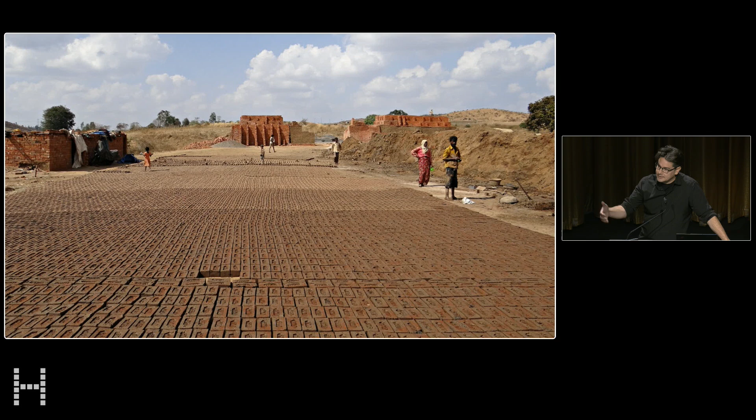It can also be transformed into something more permanent, the raw material for buildings, brick, ubiquitous. It's been described as synonymous with civilization. When we could fire bricks, we could assemble buildings, architecture as civilization making. How big is a brick? Hanif asked me that the other day.

It's important to know, how big is a brick? I put the dimensions here just in case. But the most important thing is it's about the size of a hand, right? There's a relationship between the hand and the brick. On the one hand, you hold the brick with your left hand, you hold the trowel with your other hand, and that was what allows that act to unfold. You could say that the body of the mason is inscribed in the dimensions of the brick.

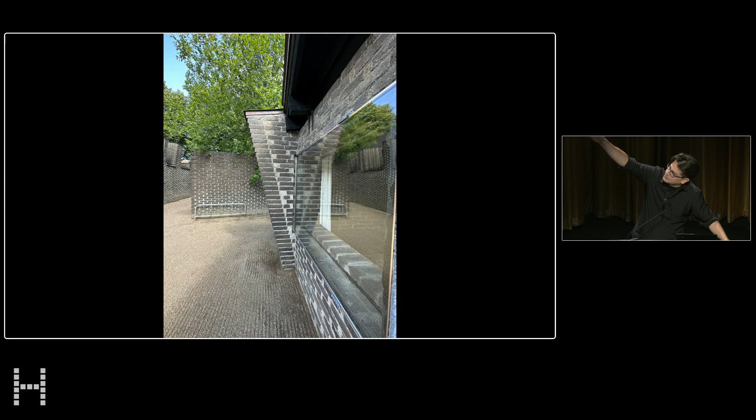You could also say that bricks have their own ethics. They bring a form of making, a kind of rigor that comes from the modularity. So Sigurd Lewerentz said that no brick could be cut on this church in Klippan, Sweden. And that simple rule of no cutting bricks produces all kinds of effects, side effects. Think about this sort of staggered or corbelled wall end with the bricks unable to be cut or staggered. The joints become very elastic and the mortar expands to allow this sort of rigor to unfold.

Closer to home, in the Harkness Commons building just up the road, Josef Albers created this mural entitled America. It's in a building designed by Walter Gropius, and he invited Albers to design a mural. And rather than add something to the wall, Albers removes bricks. He removes material, using shadow to sort of create a pattern, evoking a kind of tapestry or a weave.

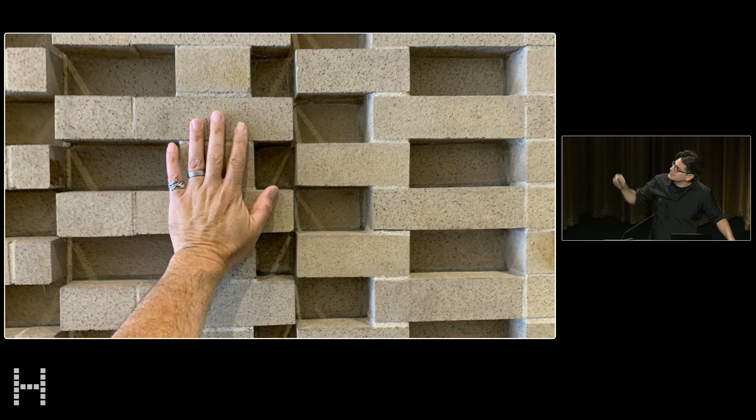You see the kind of precision of the joints, the cut brick, the sort of gap, and if you look carefully, even the gap between the bricks and the lack of mortar in those joints and the light coming through, he's sort of asking us to pay kind of closer attention to these bricks.

So a couple years ago I read this book, Red Brick, Black Mountain, White Clay, and it's been sort of tumbling around in my head. Christopher Benfey weaves a beautiful tale, a search for origins, a kind of narrative of journeys and migration. It's partly autobiographical. Christopher's related to Anni Albers, so he's searching for his origins, but he takes us from Berlin to Asheville, North Carolina, and to Harvard, looking for the sources of bricks, the sources of clay to make porcelain. But really, it's about the creative process. It's about thinking and making.

So I've been thinking about this squishy, slippery substance, clay. How do you become a great potter? You have to make a lot of pots. You need a lot of clay. Clay is an analog for practice, and pottery and its repetition is an analog for pedagogy. Learning by doing it over and over. We have a kind of impatience for solutions. We want our designs quickly, but clay is a slow medium, and I would argue architecture is too. So it's a medium of transformation of the material, but also of ourselves.

How do we train ourselves to become skilled architects? How do we train architects? We need lots of buildings, and we need lots of clay. So with this malleable material in mind, I'd like to share some examples of our work, our pottery, if you will, in the spirit of thinking by doing and continuously reflecting on what we've done and how to do it better. I've organized the lecture into six themes.

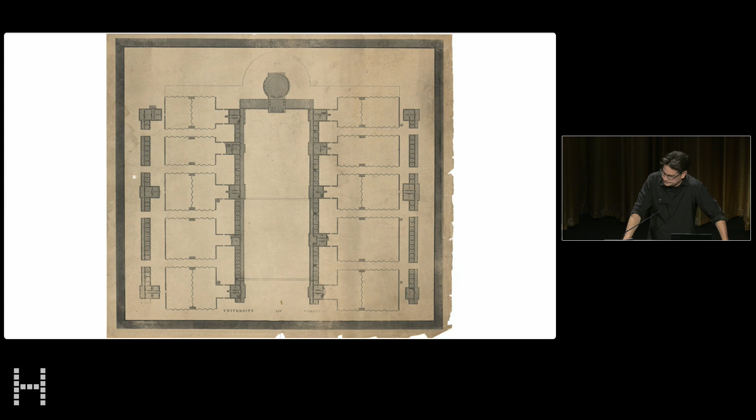Speaking about origins, many narratives of American architecture begin with Thomas Jefferson and this academical village at the University of Virginia. I learned about it as a student in architectural history. The academical village was a utopia. It was a purely conceptualized space of learning, a community of scholars here constructed in Albemarle County, Virginia. The part of Jefferson's plan that most intrigued me was the so-called serpentine wall.

Undulating gently, the curvature allows them to stabilize by effectively spreading their effective base, resisting the tendency to overturn and allowing the bricks to be one wythe thick.

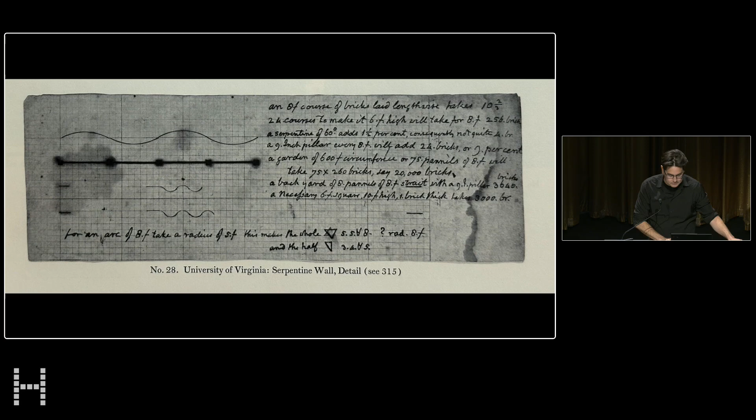This sketch by Thomas Jefferson shows his process of calculating how many bricks it takes to have a straight wall with intermittent structural supports versus how many bricks it takes to use an undulating wall. And his calculus reveals that the undulating wall is cheaper to build, more efficient, and uses fewer bricks. So it wasn't an aesthetic decision, it was an efficiency decision, an optimization, if you will. And that reveals Jefferson to be thinking as kind of a rational designer.

Now, brick makers used to press the bricks to check their hardness before firing them. So this was typical of brick making. But the choice to turn it around, to show us the bricks, I have to imagine that that's an act of resistance, right? If it's typically meant to be hidden, to turn the brick around, to reveal and expose those traces, those human traces, seems to me to be speaking to us. The mason is saying, I was here. We were here. See us.

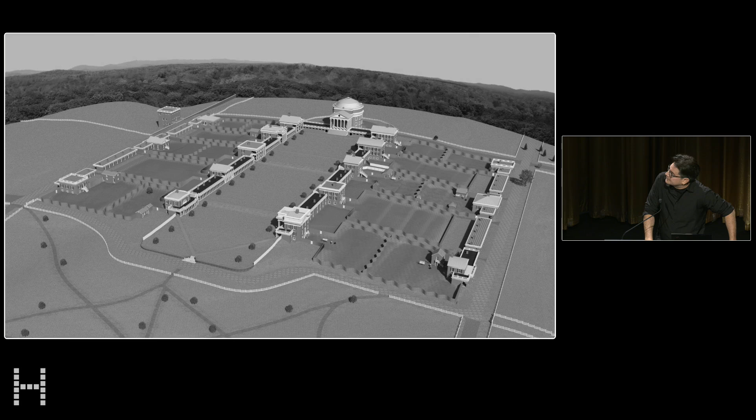The yards behind, enclosed by the serpentine walls, that today are pleasure gardens in a French or English tradition, were actually work yards. This is where the enslaved worked. They chopped wood, they slaughtered animals. They did all the work to make the university function.

And the section through the lawn shows us the rotunda as a terminus. It shows us the pavilions that, from the lawn side, we think are two-story pavilions. Louis Nelson makes a point of saying they're three-story pavilions. Jefferson placed the lawn on a ridge. The land falls away on both sides, allowing a walkout basement condition to occur on both sides. And in that lower level, that's where the enslaved lived and worked.

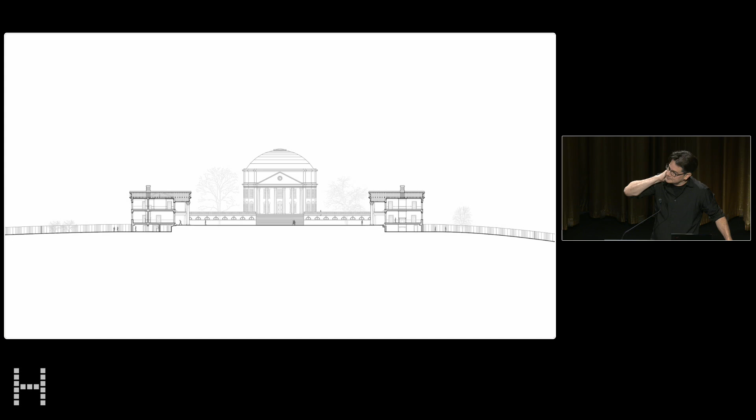Architectural historian Mabel Wilson describes Jefferson's use of the section as an architect. He's using the section to hide the institution of slavery. She interprets his use of section as a recognition that he felt that this institution was abhorrent and needed to be concealed. And the concealing of the section and the labor of the enslaved and the serpentine retaining wall were part of his plan to reconcile a society that he felt couldn't function without it, but was necessarily obscured by the architecture.

So in 2016, it was announced that there was a permanent memorial to be constructed at the University of Virginia. Meejin and I traveled to Charlottesville. We met with faculty who had worked with students on the previous efforts to build a memorial. We assembled a team, including Mabel Wilson, architectural historian, Frank Dukes, a community organizer and UVA faculty member, Gregg Bleam, a landscape architect based in Charlottesville, and Eto Otitigbe, a visual artist based in Brooklyn. And we prepared for the interview.

We engaged the committee in a dialogue, and after that we were awarded a commission to design this permanent memorial. But when we interviewed, we said we don't have a design, we're going to design a process, and that process will unfold over the next 6 months. And over the next 6 months, we'll figure out where the memorial should be, what form it should take, and how it should be defined.

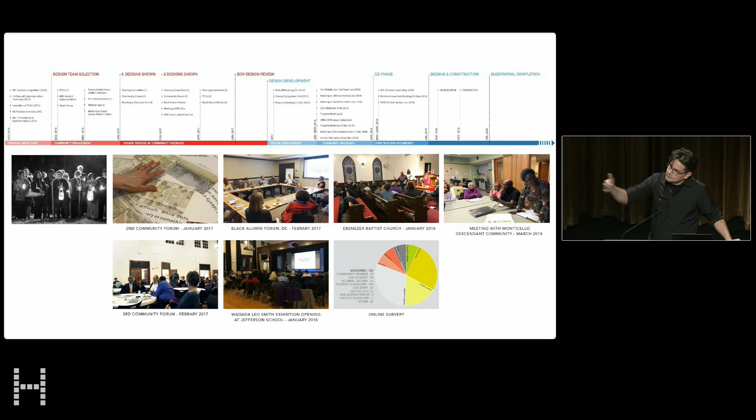And through that process of engagement with the community, with the descendant community, with the faculty and staff, with the students, but also the residents of Charlottesville, we heard what they were aspiring for the memorial, how it should tell truths, how it should begin a process of repair, how it should be situated not on the grounds, which many descendants regarded as intimidating, foreboding, unwelcoming. They referred to the campus as the plantation. The siting of the memorial slightly between the campus and the town.

So here is Mabel and Frank during one of our charrettes studying different locations, some of the engagement processes, meeting with students, meeting with community members, trying to understand what they were hoping for from the memorial. And towards the end of this process, we landed on a site here between the campus and the town. This is a slope site. The rotunda is just above on the top of the hill. And we landed on this form that wasn't an object, but was really a kind of void, a kind of hollow, a kind of opening. And we thought at the most basic level, it's a circle that allows the community to gather, to see themselves as a community.

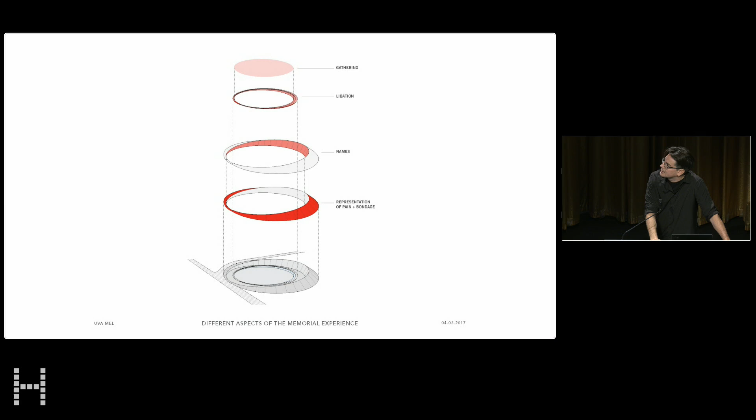The form of the memorial was a kind of a landform. It's sited tangent to the primary path. It forms two rings, one that rises steeply on the inside and more shallow on the outside. And on those surfaces are inscribed the names of the enslaved and a number of historical timeline markers on the inside. But fundamentally, the memorial was meant to be a kind of space of refuge, a kind of clearing in the woods, a place where the community could come, learn about their history, and sort of see themselves as a community.

We did mock things up, and I like to say that if you stand at the base of the memorial with your foot at the slope, you extend your arm, the line between your hand and your foot becomes a plane, and that plane becomes the surface of the cone. So from the inside, you're sort of contained within this horizon line of the memorial. From the outside, you can't see in. And that's important to create a sense of interiority, a sense of privacy and intimacy to sort of allow for a contemplative moment.

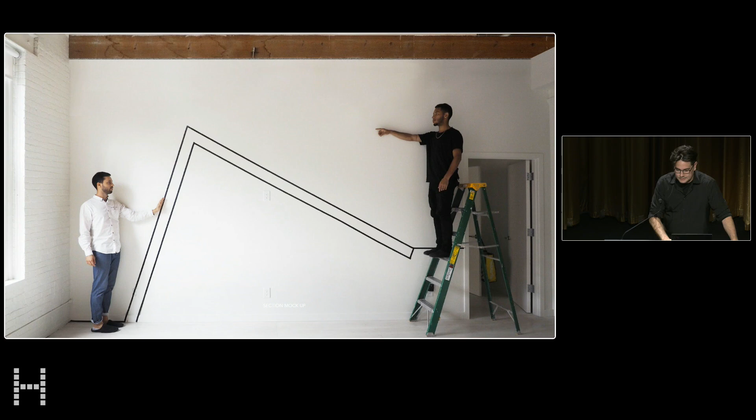And I think as architects, we struggled how to produce and integrate an image. So Eto, who is a visual artist, was visiting one of the cemeteries at UVA, and he took this photograph of this tombstone, and the rough hewn surface of this tombstone he thought was interesting. And he found this photograph of Isabella Gibbons.

Isabella Gibbons was an enslaved woman who lived at UVA. She was owned by a professor at UVA. And she learned how to read and write. After the Civil War, she stayed in Charlottesville, became a teacher, and wrote about her experiences. So she became, in a way, a kind of figure for the project, a figure of resistance, of resiliency. And Eto was taken by her photograph, and he incorporated her photographic image into the memorial.

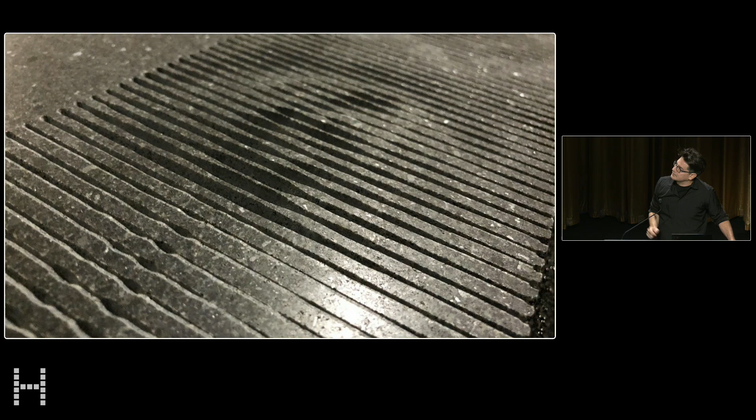And he did this with Isabella Gibbons' eyes, so sort of taking her portrait and inscribing them in the surface of the stone through these parallel grooves. And so as the light changes, you sort of see the image emerge through the variable width of the groove and the variable lighting on the memorial. So the outer face of the memorial has this scallop texture that's related to that rough hewn stone. The parallel grooves are actually evocative of drill marks that we see in quarries. And into those grooves is integrated this image.

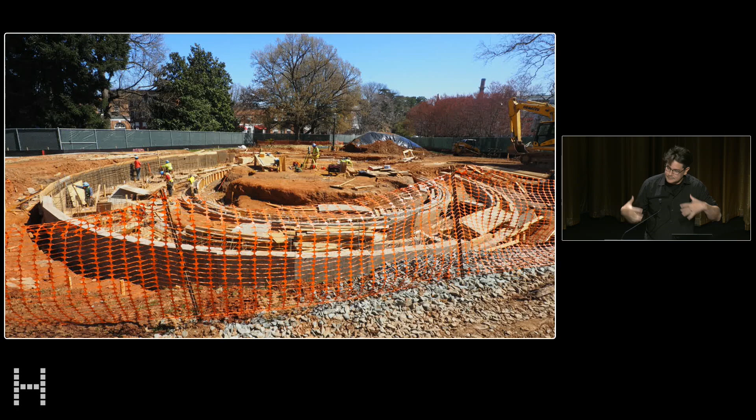And so if you squint at that, you can see the colossal eye of Isabella Gibbons looking out from the memorial. And so if you go to Charlottesville and you look at the memorial, with the right light, you can see her two eyes peering out from the exterior texture of the stone. And some of the descendants describe Isabella Gibbons as a witness and a watcher, that she's watching over them from this memorial. And that's incredibly powerful, that they've interpreted the memorial this way, and they claim it in a way as their own because their ideas went into it, and they see themselves represented in the memorial.

Looking at the construction, I noted the kind of orange color of the soil, which you see in the bricks, but it has a particular richness because of its iron content, transforming an abstract digital model into a physical thing, where one swoop produced by multiple panels of stone perfectly aligned to produce that sense of a monolith is quite remarkable. When you visit the memorial, the path is the path connecting the town to the rotunda, so everybody walks along here. The tangent relationship to the path is an invitation.

It's so easy to just veer off and enter the memorial. And as you go in, the wall on your left rises very slightly. The ground drops ever so slightly, and before you know it, you're inside. And all of a sudden, the university, the town disappears, and you're surrounded by the memorial.

One of the challenges for the memorial was to represent the 4,000 enslaved African Americans that had worked here. And one of the challenges is there were no records. There were no records of their names, and oftentimes they were referred to as extra hands, or they were referred to in property logs or letters describing a carpenter or a butler. They were known for their jobs, their skills, what they were doing. So taking the 577 partial names, the kinship and occupations, we struggled to design something that would acknowledge 4,000 individuals.

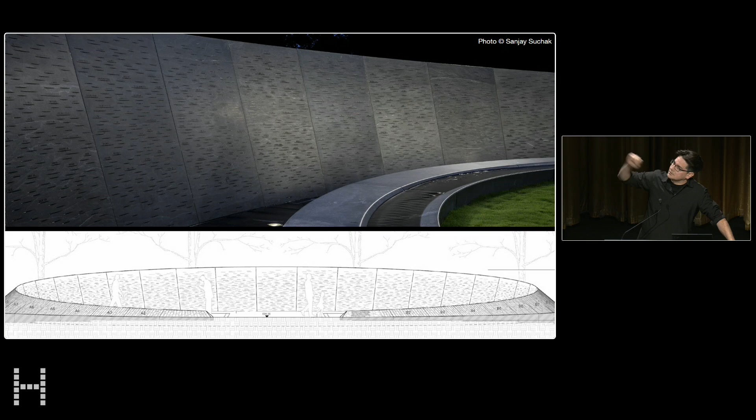And so this was the proposal to etch these memory marks into the stone, these horizontal scores, these grooves. That would be 4,000 placeholders, many of them blank because we don't know what their names were. When we knew the name, we inscribed it. When we didn't know the name, but we knew an occupation, we inscribed farmer, carpenter, bricklayer. And when we knew kinship, we inscribed mother or father, daughter. And so if you visit today, you experience this cloud of grooves, and there's 4,000 of them, and it's in a way staggering just to see 4,000 of anything, 4,000 marks, 4,000 people.

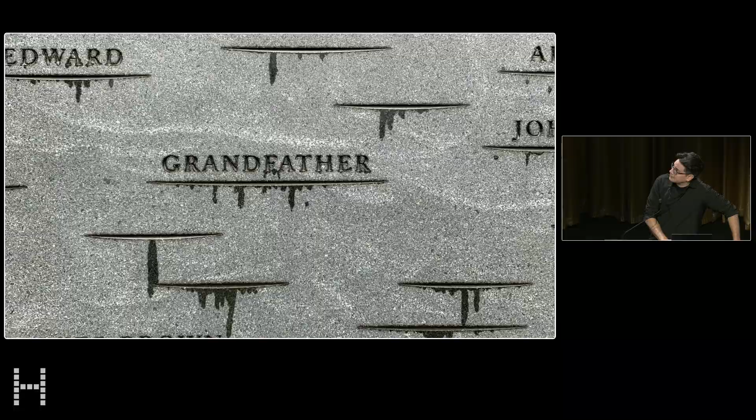But looking at the specifics, because each cut is a person, each cut represents a person whose name we don't know. So it's unknown name, unknown, unknown, grandfather, carpenter, brickmaker. If we sort of pull out and we look at the memorial, it's a kind of a rough exterior with the sort of implicit textures of making, the implicit and integrated imagery of Isabella Gibbons. We see the smooth interior and the contrast between the two.

The memorial was completed just after the murder of George Floyd and just at the beginning of the pandemic. And so in the aftermath of the murder of George Floyd, people were looking for places to grieve, places for people to gather, and the memorial became that place. People came in small groups to take a knee. They came in large groups.

It's across the street from University of Virginia Medical School. So these are the White Coats for Black Lives who took a knee for 9 minutes to remember George Floyd and to be together. And so one of the things that we learned through this was unexpected, this was undesigned. We thought we were looking at injustice in the past, and here it was serving a function of racial justice in the present, but also giving a community a place to be. The idea that architecture and landscape brings people together. It convenes, and that convening power, I think, is its power.

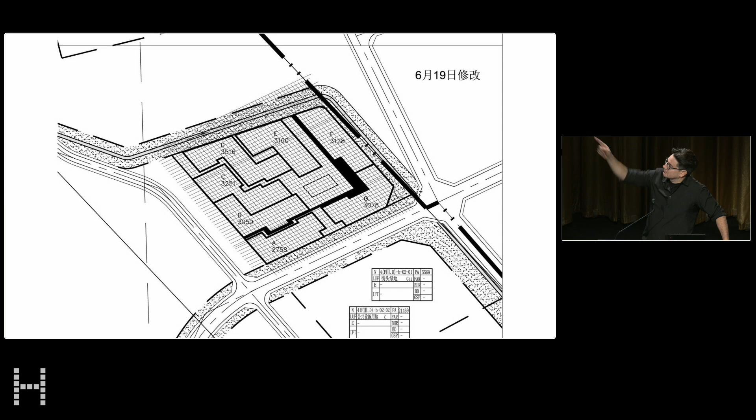Okay, shifting a little bit from memory to material, although certainly there's material in the first chapter. Material inscribes culture, it inscribes place, it comes from the earth that it was made of. In 2009, we got a cryptic email saying, we're working on a group project in Chengdu, would you be interested to join this group project? Maybe you can work on parcel G. There's 2 conditions. We require it to be a courtyard house, and it must have a sloped roof. And we said, sure.

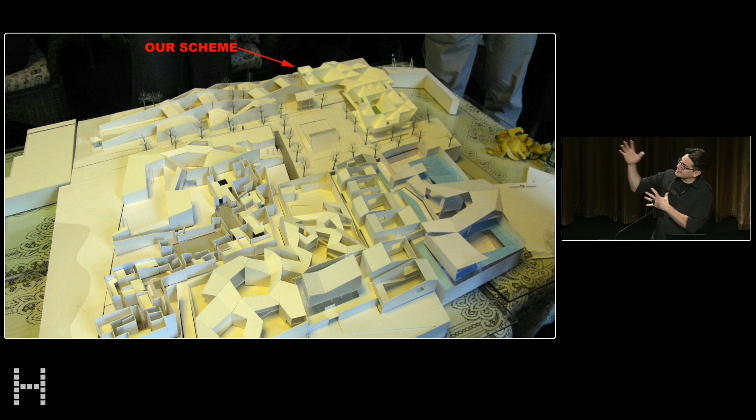We can do that. We studied Chinese typologies, courtyard houses, gardens. The courtyard house forms both a field and a figure. It can be an object, it can be a frame. And we thought that was interesting. Our first meeting with our client, we presented our scheme. All of us were reprimanded. We were almost fired. The client did not recognize anything Chinese about these projects. He was looking for something he called Chineseness. He sent us off to study Chinese architecture.

We went to Suzhou. We went to the Emei Mountains. We climbed up the mountain. We were woken up before dawn. We were marched out to the view, and Philip Yuan, who was standing next to me, said, "See that? That's Chinese feeling. That. Can't draw it, can't specify it, but that's what we're looking for. Can you do that?" We went back to the drawing board.

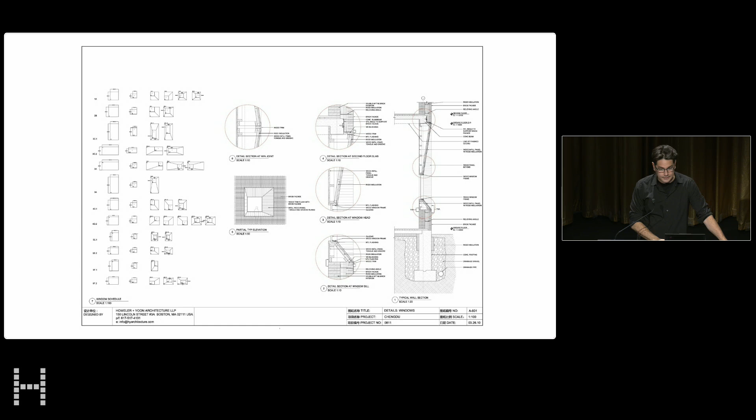We redesigned the building. We incorporated elements: windows, composed brick, slopes. We finished our drawings of the windows with their Corten steel surrounds. We submitted our drawings, and then we waited. This is 2010. We didn't hear anything for 6 months, and then we got an email saying, congratulations, the project's under construction.

It's a different site. It's a different program. And we've mirrored your plans. But we'd like them updated. Could you please have them to us in 2 weeks?

So I went to Chengdu. I couldn't believe it. I wanted to see with my own eyes what was happening. They were, in fact, building our plans, mirrored backwards. I say in China, it's not less is more, it's like more or less. It's like more or less like your plans, not quite exactly the way you specified them.

So we completed our drawings. We picked this beautiful gray brick for the facade material. We figured it's the thing that ties it to the place. It's abundant. Could we do brick in a slightly different way that would sort of evoke the place and give it that sort of Chinese feeling that would ground it in the place, be familiar to the client, but also imagine what it could be.

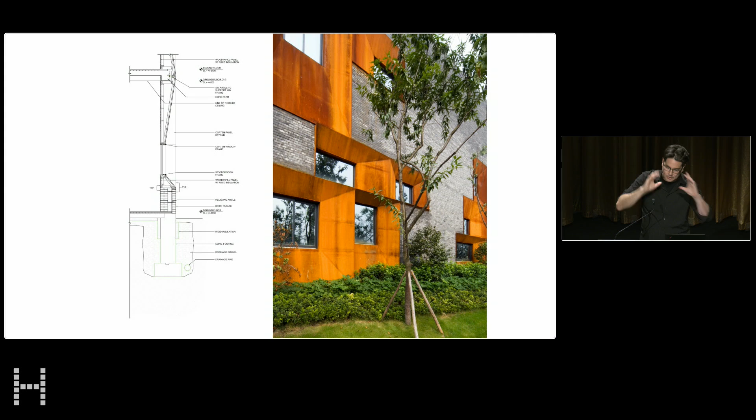Interestingly, halfway up the wall, they ran out of certain bricks and they used different bricks. And so we have this sort of transition of color, which we found disturbing at first. But actually, now that I think about it, it's kind of nice. If it were all uniform, that would be flat. And this has so much more character. The window surrounds are Corten steel. They amplify these small punched windows, make them into larger configurations.

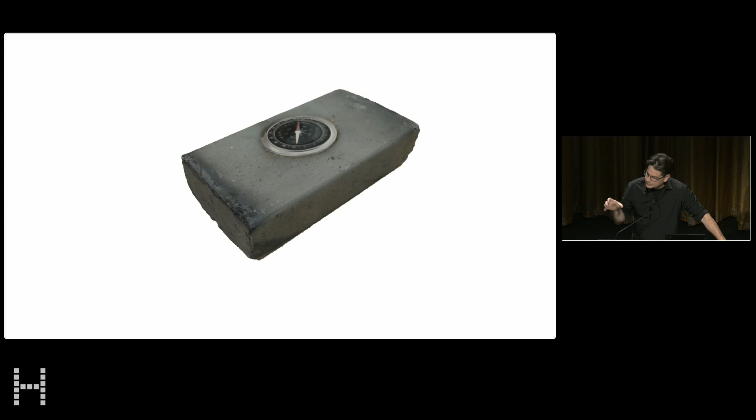So we produced 2 sheets of drawings. We said every brick will be cardinal, regardless of the local geometry of the architecture, right? The wall is oblique. When the wall goes oblique, the bricks stay cardinal. A simple rule, one that you could transmit across culture, across geography, across distance. And so the brick masons laid the brick, and they laid it faithfully.

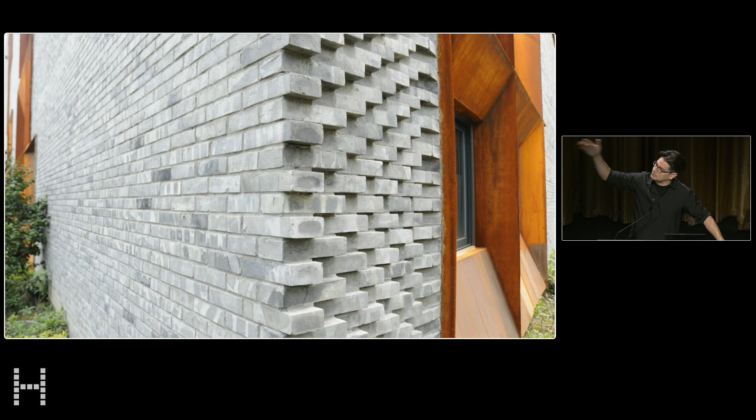So this is an east-west wall, flat. This is an oblique northeast-ish wall that cuts on a different angle. And so in its texturing, in its feathering, it reminds us of where we are. It reminds us of a kind of larger, global Cartesian orientation. And it alerts us to which walls are oblique. And it also has this incredible texture.

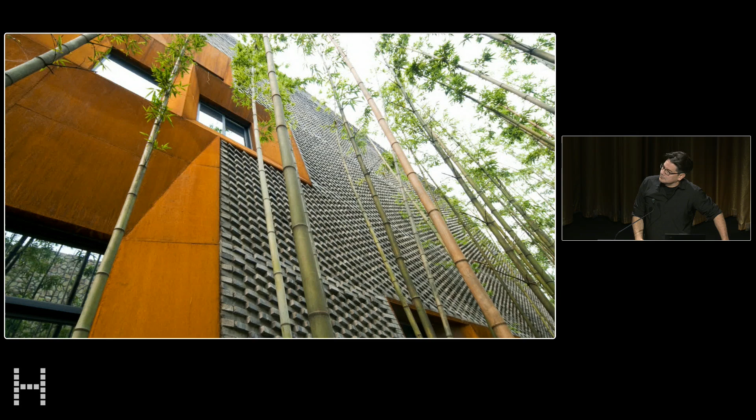When this was finished, the client said, "You've got that Chinese feeling," which was an incredible compliment because we didn't know what that meant. It was familiar enough to him, and for us, it was innovative enough. And we've somehow found some sort of middle ground where it was speaking to him and it was also resonating with us.

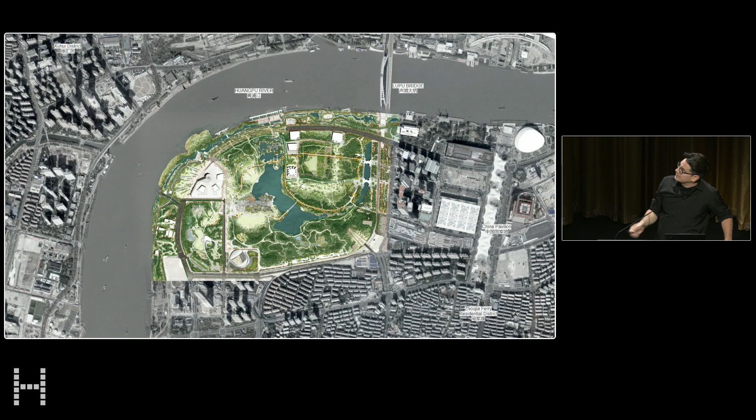Fast forward. This is the site of the 2010 Shanghai Expo. It was a former industrial zone. And after the expo, wait, is that the expo? That's after the expo. It's a brownfield site that was projected as a public park. So a new public park in Shanghai. It's a massive park, complete with artificial lakes. Some of the pavilions, like the China pavilion, are still there.

We were asked to compete for 2 bridges that would be connecting the landscape to the subway. We said rather than design 2 bridges, maybe we design 1 bridge with some holes in it to frame the sky. That seemed like a good idea. We presented the scheme.

I said something like, it's not about geometry, it's about relationships. It's about vistas, near and far. It's about spaces to be alone. It's about spaces to be together. And I saw the head of the jury nodding, and I thought, okay, I found a hook. They awarded this competition, and then again, it went silent. And for 6 months, we wondered what's happening.

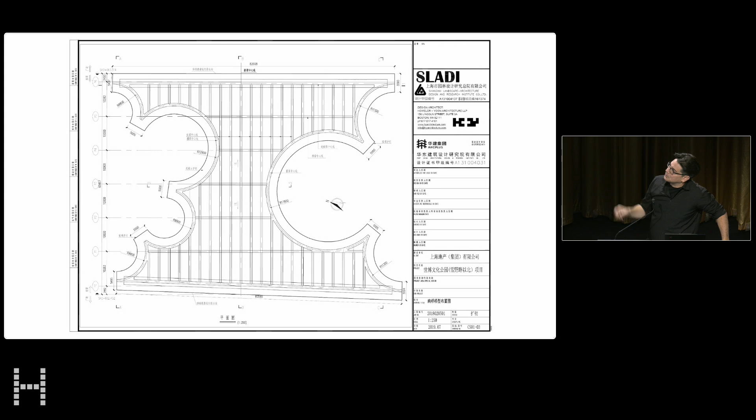One day we got an email saying, oh, we're developing your project. We can't seem to get it approved. Could we ask for your help? And so we were brought back into the process to help refine the geometry to allow them to get approved, to allow them to build the project.

So during the pandemic, we get these photographs. Astounding to see the construction of this bridge. It's wider than it is deep. It's an atypical engineering feat. And the other thing we discovered is there's a parking garage underneath it, right? Which wasn't there originally. So yes, bridge over lake over parking, connecting to subway.

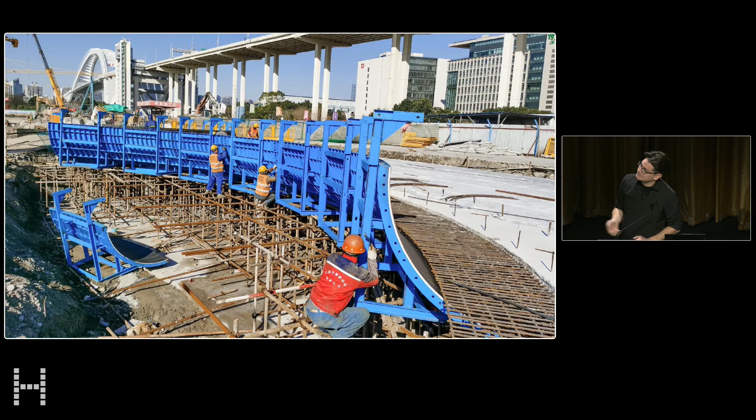We asked for these compound curved concrete forms. So they're curved in plan, they're curved in section, they're toroidal, right? They're constantly revolving to produce these beautiful hull-like underbellies to the bridge.

We asked for the surface of the pavers to be granite and transition from granite pavers in the flat to these textured rotating modules on the parapets. So that it would always have that texture, or the reminder of the individual unit, even as it approximates a kind of monolithic whole.

And it did produce moments of, you could imagine a large group gathering on this plaza. You could imagine a solitary person looking out over the landscape. So it does achieve a kind of flicker between the individual and the collective, between an infrastructural scale, a landscape scale, and an architectural scale.

Thinking about environment, we proposed this pavilion in Shenzhen. So we've been doing a lot of work in China. Shenzhen is just north of Hong Kong. It's one of the cities in the Pearl River Delta that had explosive growth. A number of new business districts are popping up around transit, and this pavilion was meant to be an amenity in this park.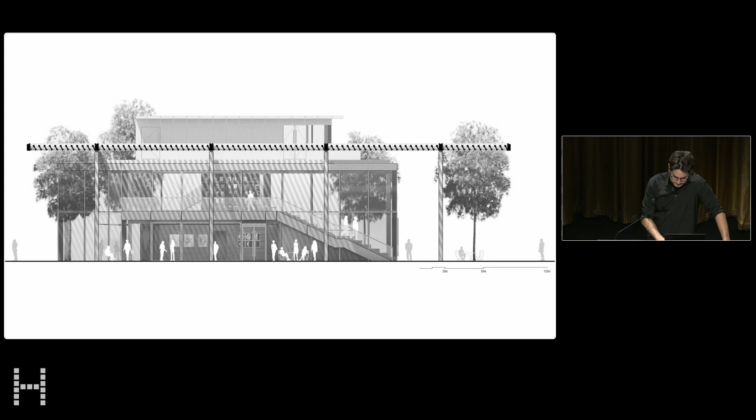We looked at the surrounding context and said, how would this perform without a shade, and how would it perform with this shading canopy? We designed the canopy to index the orientation of the sun as it moves around. We looked at different shapes and wondered, could this do more than just block the sun? Could it diffuse the light? Could it create a quality of light?

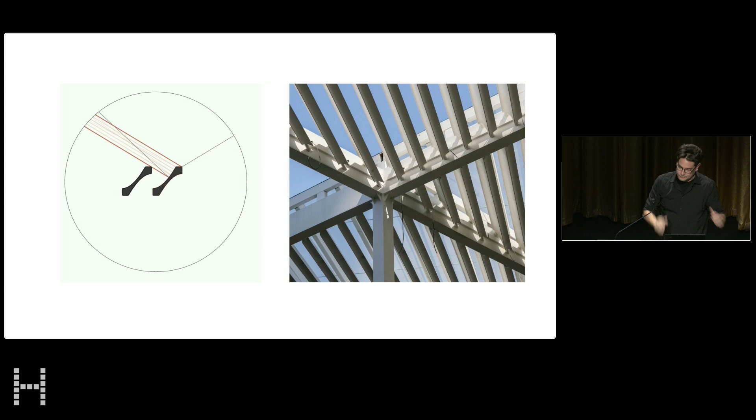And we were reminded of Miguel Fisac, who did these beautiful concave profiles that bounce the light into the factory buildings. And so this was a pair of concave profiles that bounce the light around and allow for diffuse light to enter underneath the pavilion. We specified a custom die for a custom extrusion, and this was a construction photograph with these extrusions spanning between these frames.

During the pandemic, it was used for a COVID testing center, which I guess is a testament to its civic position. But it is a kind of anchor program within this new development. And I do think, given its extents, that it can create a transition between inside and outside, between conditioned and unconditioned.

Just coming back to the States for a moment, this may look like University of Virginia. It's not. This is Yale, the Divinity School, designed by Delano and Aldrich, 1932, modeled on the academical village. So the academical village is lurking within our imaginary of what is an institution of higher education. So 10 pavilions terminating not in a library, but in a steeple, right?

A church. When we were approached by the Divinity School, they asked us to do an addition, to add a dormitory to this precinct. And we said, how do you add to something that's complete? It's perfect. It's perfectly complete. How do you do an addition to that? The other challenge was that they wanted Living Building Challenge, which is incredibly hard to achieve. Living Building Challenge is not just sustainability, it's equity, it's energy, it's water, it's materials, it's health, it's all these things.

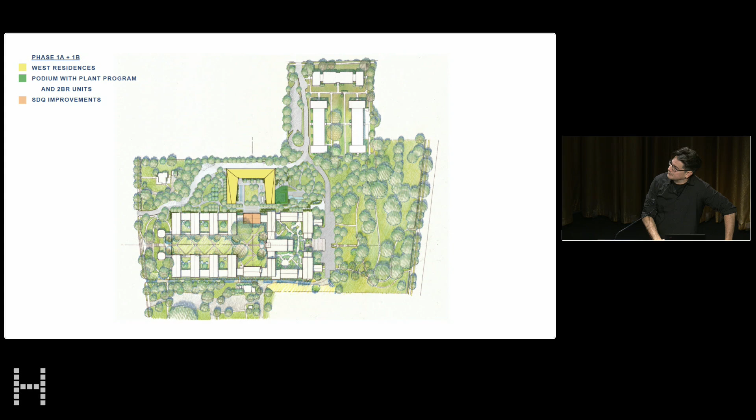So this is the site plan we developed for the Divinity School. It's another room. Yale is made of all these outdoor rooms. It's an outdoor room adjacent to the symmetrical quadrangle of the Divinity School.

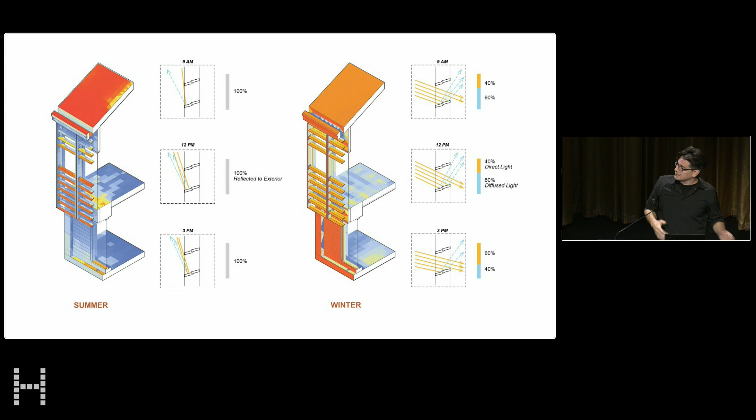It takes its primary profile from the pavilions, and then it extrudes them into a roof form that's determined by the sun angle. Right? It's facing south. We're turning the roof towards the sun. I described it as a kind of sundial or a sunflower. The facades are screening daylight on the interior faces.

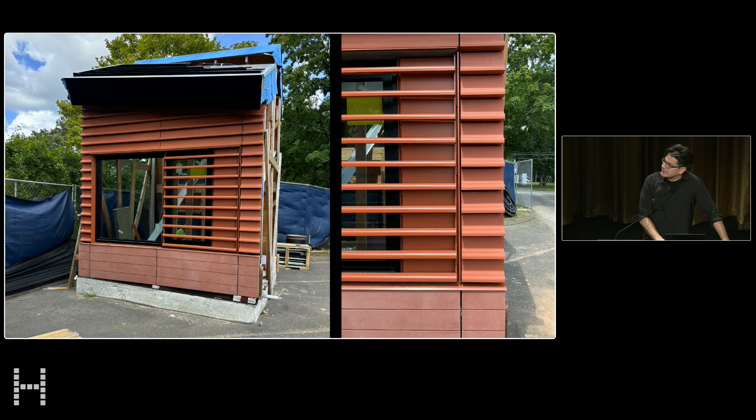And of course, with Living Building Challenge, we're sourcing these locally. We're accounting for healthy materials. We're accounting for labor. There's water purification. There's a lot of solar power generation. This is an incredibly complex certification process to produce this Living Building Challenge building, which is currently under construction.

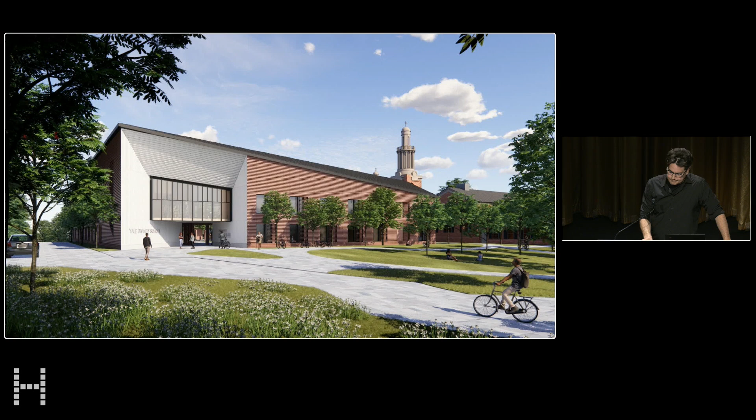This is the visual mock-up. And these are the terracotta extrusions that will be cladding this new addition to the Divinity School. One of the things about the Divinity School is that they can't find the front door because there's so many front doors. And so one of the elements was, can we create a new sort of gateway? And you know Yale has all these particular gateways framing these outdoor rooms, these courtyard spaces.

So here's a new dormitory with 54 beds. It's Living Building Challenge. You enter through here, you find this courtyard, then you enter into the traditional courtyard, and the spire is still the wayfinding element. But you see the horizontal texture of the terracotta facade, and it slips over the windows to blur the edge between the punch window and the opaque walls.

So that's another version of thinking about environment, thinking about it rather comprehensively. How do we think about not just operational energy and energy production, but how do we think about preservation and embodied energy? In a way, the building that you don't build, the building that's already there, is the most sustainable thing.

So the Coolidge Corner Movie Theater is a historic theater built in the 1930s. It's beloved. They've got this Art Deco marquee. We were asked to add 2 auditoriums, 2 movie houses to the back of the building. So you see our building just peeking into the alley. If you've been there, this alley approach is part of the quirky culture of the Coolidge.

This was the back side of the building as we found it, very much a back, fire escapes. The projectionist has to climb the fire escape with the film to get to the projection house, rain or shine. So that wasn't good. We tried to turn the back into a front, and so we added the 2 movie houses, preserved all the egress while creating a new front, a new glowing lobby space, and the movie houses within the opaque textured figure of the new theater.

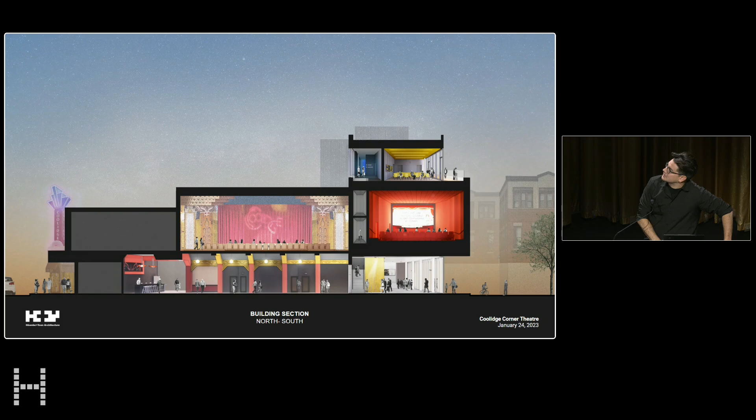So here's some diagrams of its circulation. Here's the historic theater. It's one of my favorite theaters. If you're looking for a big movie, you want to see it on film. We saw Dunkirk in there on 70 millimeter. That's the place to see it. Our new movie houses, house 6 and 7. If you check what's playing, check which movie house it's in. They'll tell you, movie house 6 or 7, the red one and the blue one.

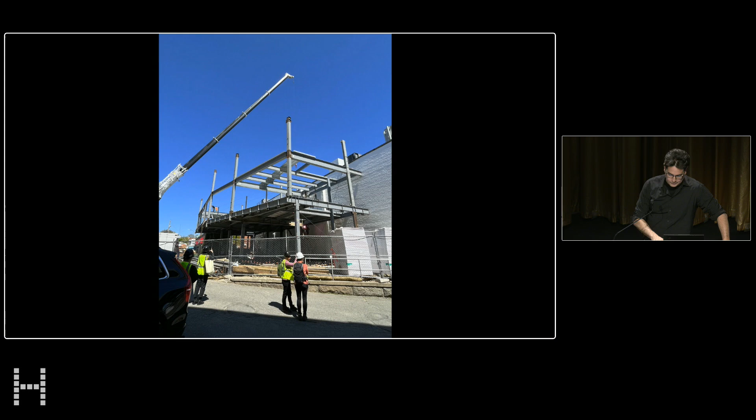How do you add to a historic building without impacting it? We learned that our foundations shouldn't surcharge the existing footings. So rather than build adjacent to it, we set back, and then we cantilever back. And I say, our building just kisses the historic building. See, we're setting back and just kissing that building. Here's the floor plate. We did insert a new elevator into the footprint of the historic theater.

That was tricky. The Art Deco brickwork was one of our cues. The corbelling seen here in the brick, the herringbone patterns here. A lot of exuberance. I told them Art Deco is not a style, it's an attitude about technology. It's an attitude about the future. It's about electricity, radio, film.

And so our proposal included this undulating brick wall where each brick is articulated and it produces this rippling effect. We thought this was achievable by simply increasing the length of the tiebacks to achieve this curvature. As they started to lay the bricks, the mason said, hey, if you'd like these to be curved, we can just smooth them out for you.

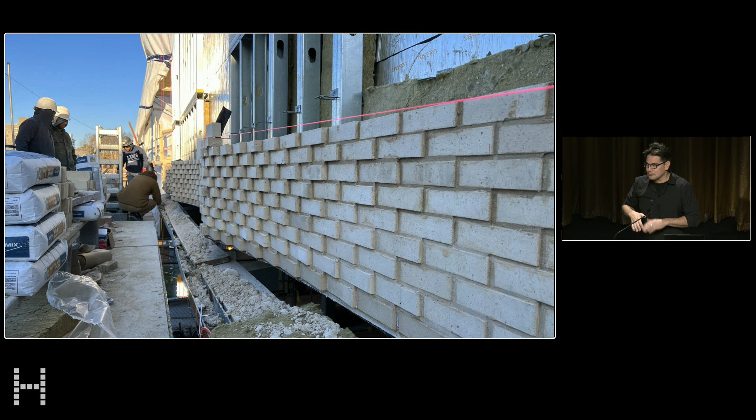I said, no, thank you. We like the texture. And they said, you might get some icicles. I said, no, thank you. They said you might get some water sitting on that, and it might undermine the mortar. I said, oh, God. We called our consultants. We did an icicle study. It's south-facing. It turned out that we could do a 3/4 inch overhang without risk of icicles, without risk of undermining the mortar. And thank goodness they went forward with the textured brick.

It's south-facing. It gets this incredible blast of sunlight. Even in the winter, it animates the facade with all these shadow patterns. It's really lovely, even under construction. So that is a historic building that, by adding to it, in a way, we gave it a kind of a life extension, right?

These institutions are not-for-profits. They're struggling. They can't meet the needs. Adding theaters to it allows it to achieve a kind of financial stability, and it kind of allows it to continue to function. This building actually won a Historic Preservation Award, preserving the institution while animating the historic theater with an addition. So that was lovely.

Shifting to housing. Okay, topic 4. Okay, I see. I got the sign.

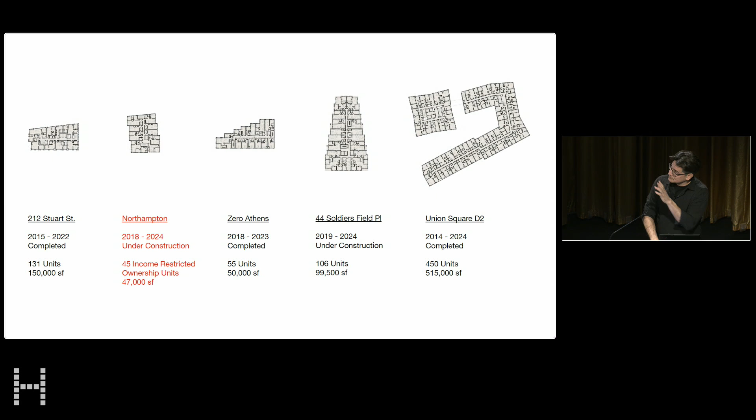Housing. I'm going to fly through this. We have a housing crisis in Boston. Mayor Wu is desperately trying to build more housing. It's so unaffordable. Cost of construction has exceeded value creation. At that point, we don't build anymore because it doesn't make any sense. In the past few years, we've designed a number of multifamily housing projects. All housing projects in Boston have 13% affordable units. It's inclusionary zoning. It produces affordable units as a byproduct of producing new construction.

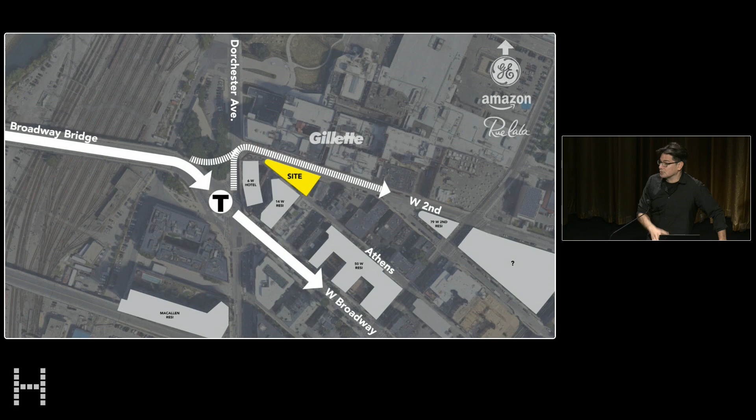I'm going to show you very quickly 2 housing projects, this one on a site in Southie. It's a site that was so narrow that nobody thought they could build on it, so it was overlooked by development. Development just passed it over. We got 55 units on this wedge-shaped site. All the units have outdoor windows, outdoor corners. We clad it in this terracotta shingle, which produces this lovely texture. So it's in a brick neighborhood, but it's not brick. It's got the texture and the material, the richness, but it's not literally mimicking its context.

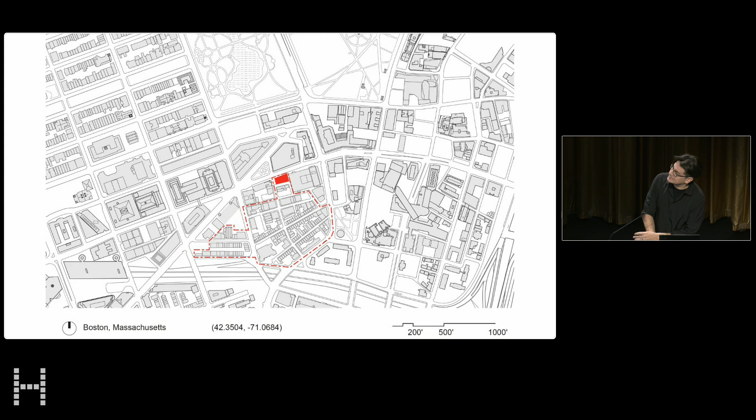In terms of Boston, we built this building, Stuart Street, in a historically landmark neighborhood. This is Bay Village. It's right along the edge. It was a parking lot. Again, this site was so small, nobody thought they could build on it. So we got 131 units on this narrow plot. We thought maybe it would be good to clad it in something rich and thick and deep. And so these concave panels that we proposed as precast were optimized for the crane pick, not for the module or the mold, but actually for the crane, the optimization for speed of construction.

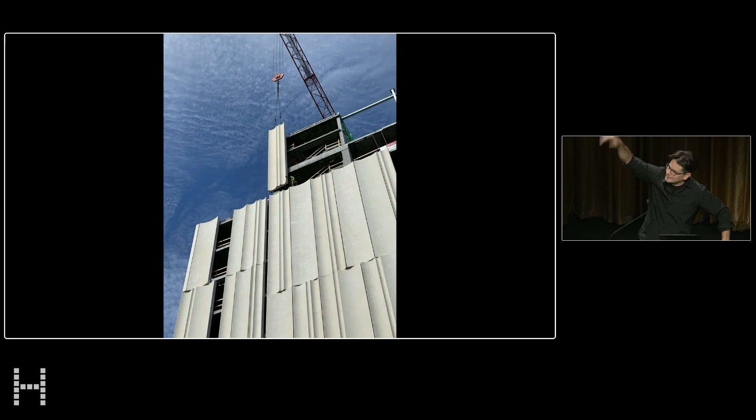So these are 30 feet long. They extend without joints. And so when you look at it, you're like, what's so unusual about this? There's no joints in it. It's extending for 30 feet, giving it a kind of verticality. And the glazing is just an infill, just a gap in between.

The story about this project is the neighbors to the south. They're in 2-story brownstone units. They've got stoops, they've got little flower boxes. They're looking across the street. They're like, this is a monster apartment building. I don't want to look at your mechanicals. So we said, okay, well, we can add 2 townhouses here with stoops and flower boxes and windows. And so they look across the street and they see neighbors. They don't see a kind of tall building. They don't see the back of our mechanical screen.

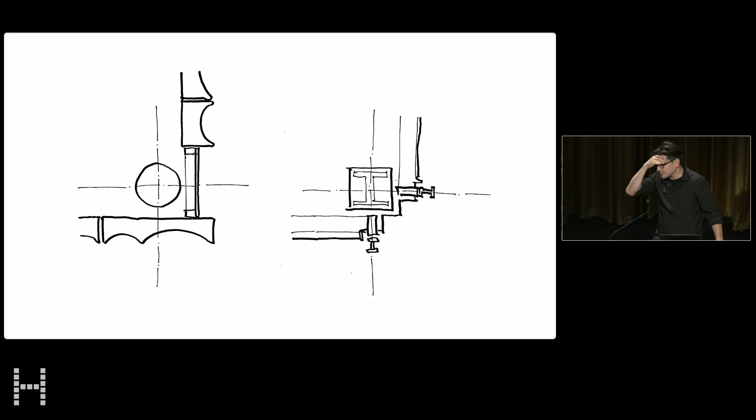I did this drawing because I was wondering about corners, right? I teach about corners. Harry Cobb says there's 2 types of architects in the world, those that dimension to the center line and those that dimension to the face. And for years I worried that I was the wrong kind of architect. You dimension to the center line when you're using modules, right? The universal grid, it's a mullion. Doesn't matter how wide the mullion is, as long as you're on the center line, you're good. That produces the Miesian corner.

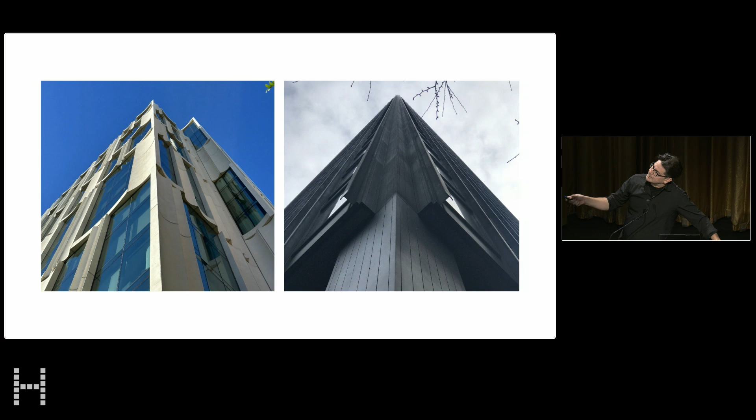Our building certainly has center lines, but it also has faces. It has the face of the building, which is on the property line. And it alternates. So you get this, you get this, you get this. As you look up at the building, you're seeing the dimension of the panel as it rises, as it alternates, left, right, left, right, left, right, which is different from this, which is just a kind of extrusion, just like the mullion.

Okay, I'm gonna fly through this. So I teach cases in contemporary construction. I ask my students, what's the difference between fabrication and construction? Anybody know?

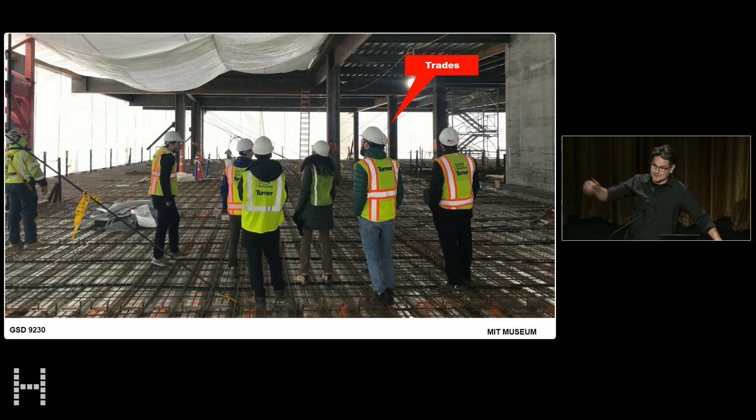It's trades. We have a lot of trades, and all the drawings outside in the lobby attest to this. What are the trades? This is the MIT Museum, all the different disciplines coordinating this. It's important to recognize that our job is to sort of orchestrate all those systems coming together. Very quickly, one of the things I ask my students to do is to draw a facade for a structural frame that looks an awful lot like the Seagram building.

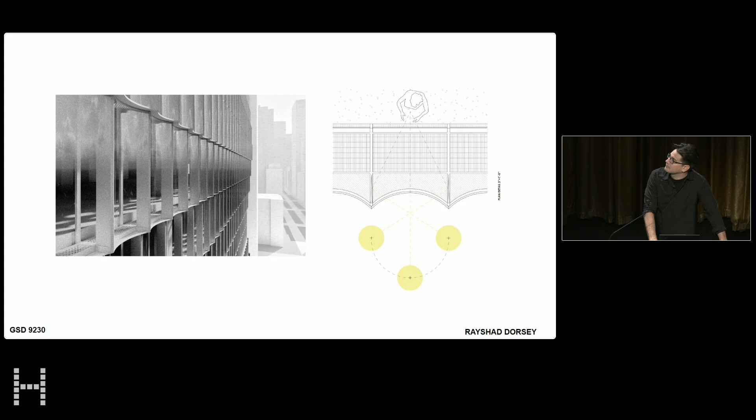This is Rayshad's project. He looked at the corner with these undulating curved glass panels, and he produced his own version of a corner. This is Ken Hasegawa, who was looking at ETFE, multi-story inflatable modules that turn the corner completely differently.

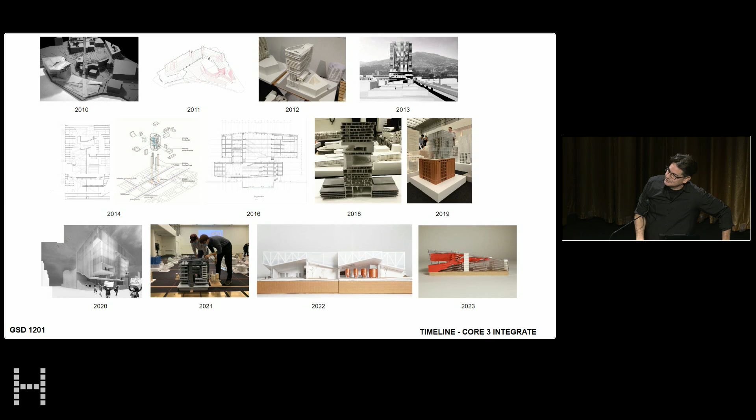Core 3, I've been coordinating Core 3. I've got a whole timeline of all the different studio briefs. I'm going to actually present this in Scott's class on Thursday. How have we been thinking about these assignments? How have they challenged us in different ways? I talk about life safety. I give the example of the ICA as a sort of structurally active megatruss.

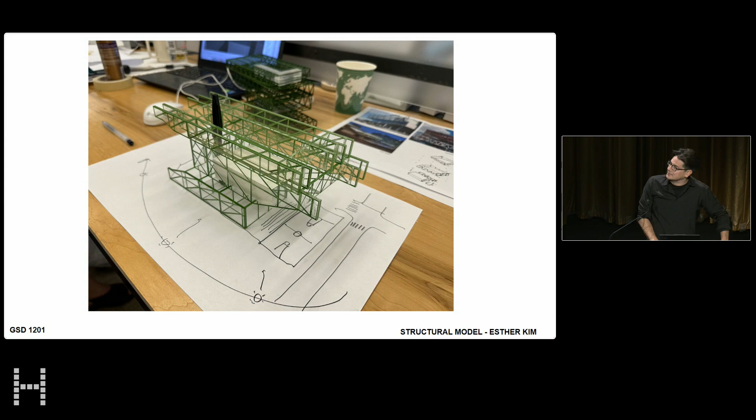And my students, like Ian Miley, built this model with tape, showing how the structure is allowing it to span over the highway. Esther Kim's model from last year introduces a kind of structural solution, but it also starts to hint at a kind of environmental solution. The building self-shades on the south face.

Okay, I'm running out of time, so I'm going to jump maybe towards the... Okay, maybe I'll fly. Are you guys okay? Can I go a little bit after 7:30? Okay, I'll keep going, but I'll be succinct.

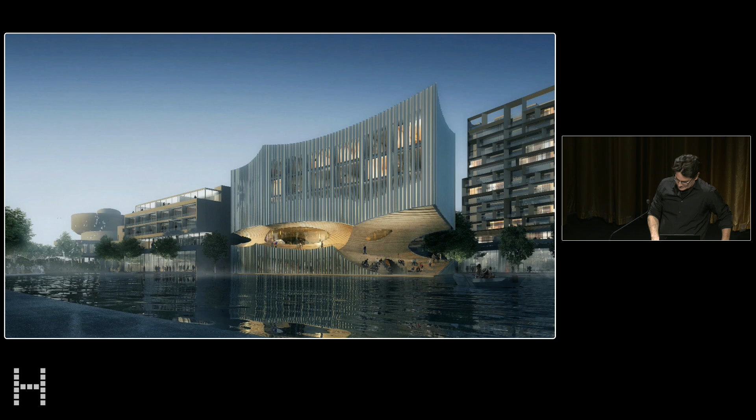Okay, so this is the Lithos Hotel, also in Chengdu. We built this model, which looks a little bit like the models that the students are building in the trays. And I like to say, you got to walk the talk, you got to talk the walk. We build models like this, our students build models like this. This is a very effective way to understand how this truss is behaving in 2 directions, is cantilevering in 2 directions. And so building physical models is an incredibly tactile way to test the stiffness of a solution like this. This is the form, and this is the structural solution.

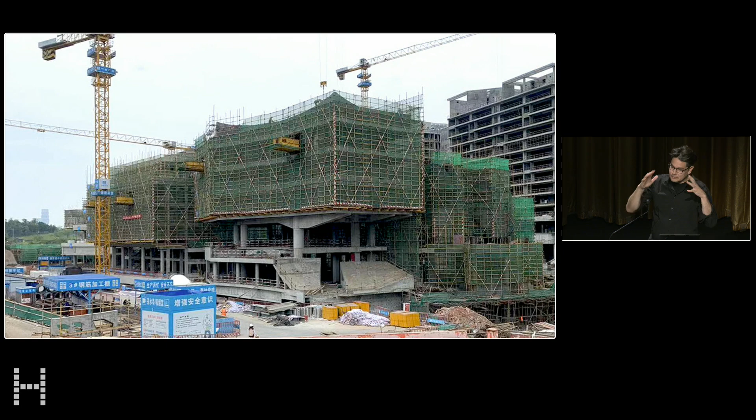We were surprised to see these photos. Not only did they build it, which we had no idea that they would do, but also they deleted the truss. You see, instead of a steel truss, it's now a concrete beam, right? A massive concrete beam. So even though you think you've got it all figured out, and then how do you clad a building that's meant to look monolithic, that's meant to sort of cohere?

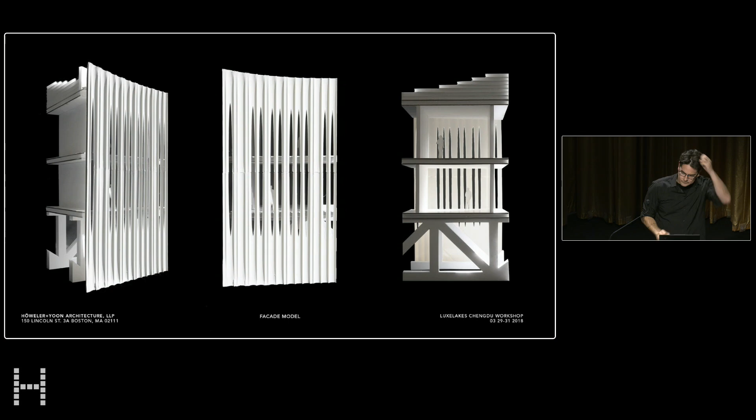We proposed these sort of extruded aluminum concavities that were then cut to create these slots that would produce the screening of the building. Here a few months ago, these custom extrusions that have been cut to produce these slots for the hotel. And that's the building at the beginning of the summer.

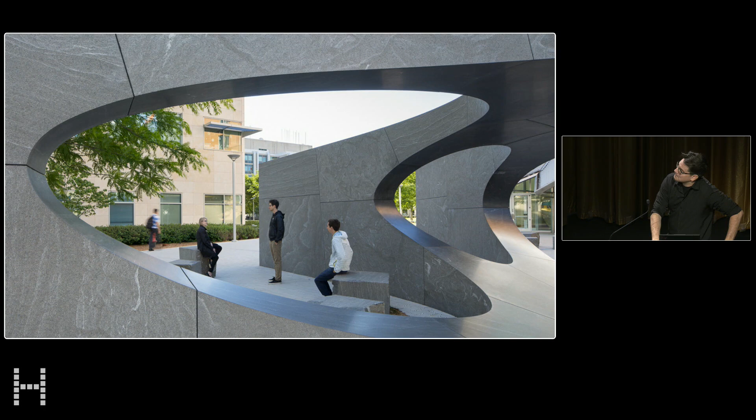Okay, shifting gears, now back to MIT. Grace described this already so powerfully: the joints in the arch, that's a conspicuous absence, right? Sean Collier was killed in the line of duty. How do you memorialize him? Maybe we need to highlight his absence, highlight that something is missing.

So, and then this question of fortis, mens et manus, and fortis, strength. How do we translate strength into memory? So here's a figure and then a missing figure that's kind of pantomimed in these buttress walls. Then Meejin proposed to make it out of solid stone. It's not just a form, it's actually a material. It's mass, it's massive. How do you build an arch? Well, the principles are well known. It's compression, there's no tension in it.

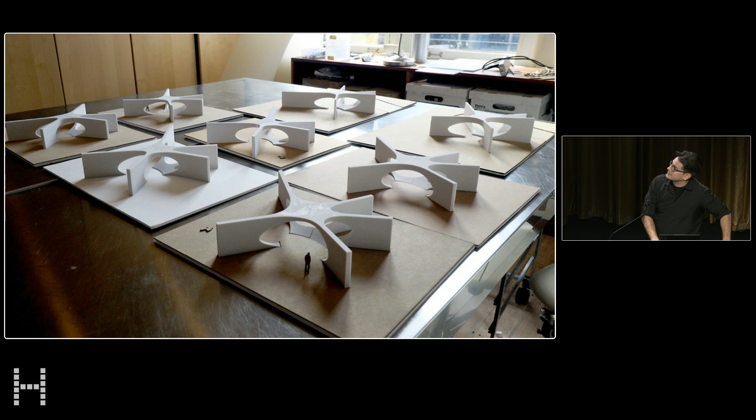We built lots and lots of models. We worked with John Ochsendorf at MIT to figure it out. You know, the catenary chain, so inverted, the pure tension chain is the pure compression arch. So principles of compression, principles of load distribution, what lies below the ground.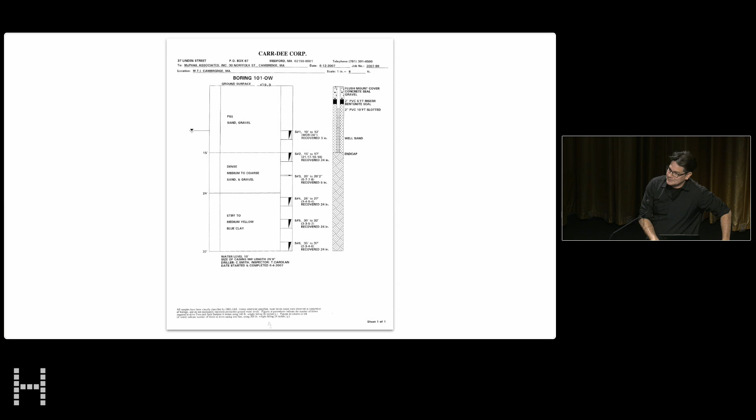So we checked our geotechnical reports. There's clay there, by the way. There are micropiles. So you're putting all this force into the ground, but what's the ground doing? The force in the ground has to be tying back together, right? The grade beam is the tension that resolves the compression forces going into the ground.

Halfway through, we realized there's a duct bank underneath our memorial. Turns out all of the power and data to MIT were running underneath the memorial. So gratefully, our grade beam and our arch was able to span over that.

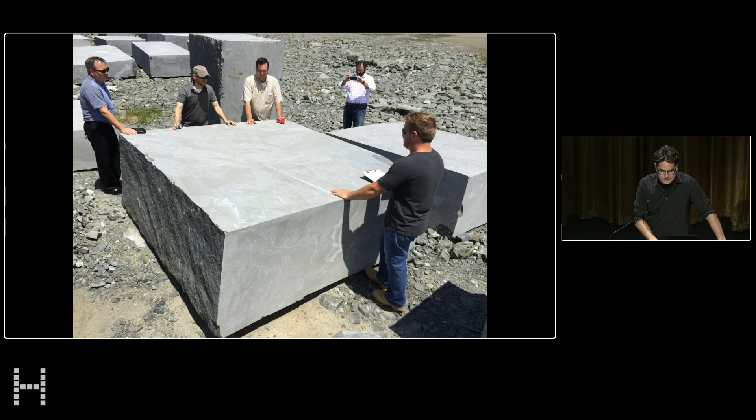The stone blocks were massive. These are not kitchen counter blocks. These are blocks that are much bigger. They were milled with impressive machinery. We did drawings of every single block. This is the thing. When we fabricated it with robots, we said, here's our digital model.

And Jim Durham from Cornerstone said, how do you know where the stone begins and ends? How do you know where the saw begins and ends? I said, well, the saw blade is a constant, and the stone is a variable. And he said, aha, but the saw is wearing at a different rate than the stone. You're cutting the stone with a diamond-tipped saw, but the saw diameter is decreasing every time you cut.

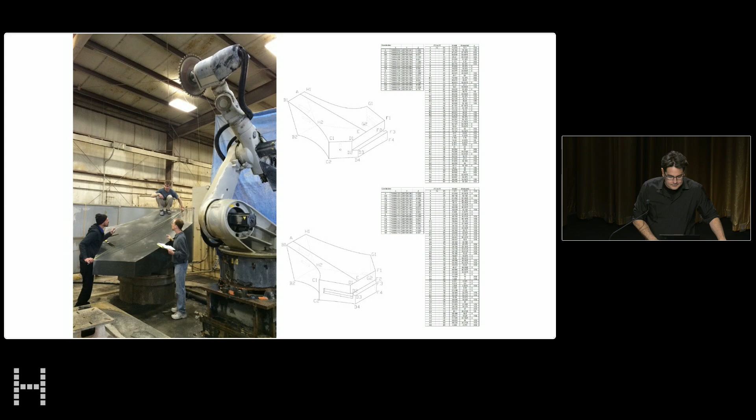So I thought, oh my God, what about our digital model, right? What about our faith in the kind of digital process, right? Turns out the saw blade is diminishing, and the saw needs to be calibrated frequently and adjusted so that we get this sort of perfect, with tolerance, stone block. So questions of digital workflows, questions of our kind of faith and our allegiance to the digital process.

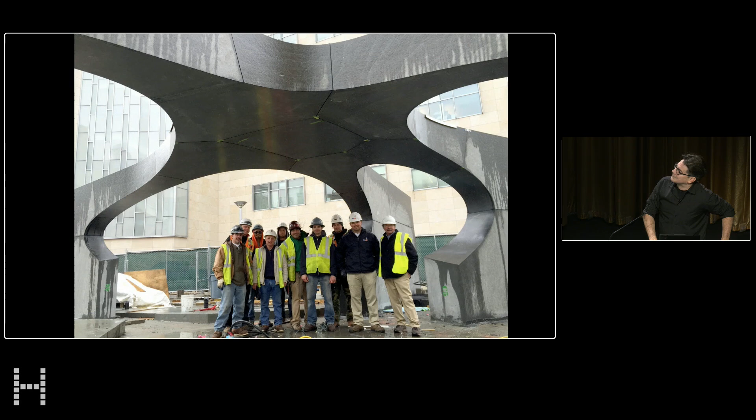This is a beautiful piece of Virginia mist. You see the veins wrap around, and so you see that it's solid. It's not veneer, it's not post-tensioned. It is stone bearing on stone bearing on stone. This was measured as it was constructed. It was monitored by MIT master's and doctoral students. And when the scaffold was removed, we see for the first time this sort of void, this sort of figure, the absent figure was revealed.

Okay. And this changed our thinking. We thought about material and media. We used to talk about media as material. Now we talk about material after media. How do we work material with all of our tools?

Okay, quickly, pedagogy. That's what we're talking about. This is Columbus, Indiana. Columbus has been called a kind of pilgrimage site for modern architecture.

Oh. Sorry about that. I'll restart later.

So Columbus, Indiana, small town. It's not Columbus, Ohio. Small town. Great architecture. The Miller House by Saarinen, the First Christian Church by Saarinen Sr., the North Christian Church by Saarinen Jr., SOM, I.M. Pei, Venturi, SOM, Iwamoto Scott, Marlon Blackwell. These projects were funded by the Cummins Foundation. Cummins says, if you pick one of our architects, we'll pay their design fees. It's a pretty good deal.

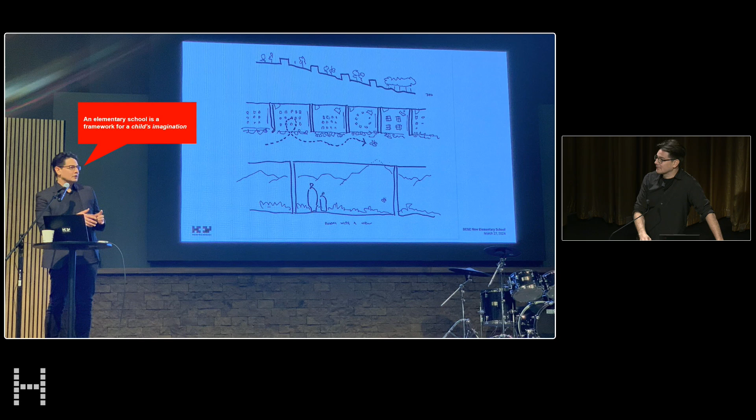I pitched for the elementary school. I said the elementary school is a framework for a child's imagination. That sounded pretty good. Then they hired us. This is the site. It's an empty field with these beautiful trees. We said maybe the school should just frame that. Maybe we should just make sure that we're always aware of the context that we're in. And so the school has all these vistas back out. This is fresh work, by the way, never before seen. So it's still smoking.

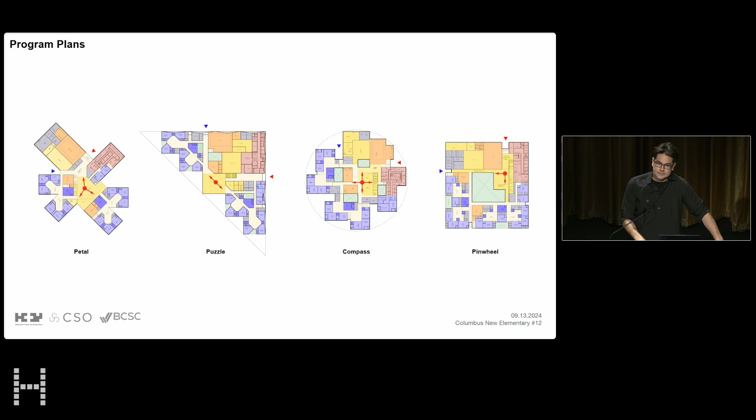The school is organized around the neighborhood unit. 3 classrooms share an activity zone with 3 other classrooms, and there's a flex room in between. We're learning about schools. All these schools have the same program, but we organize them completely differently. And so we proposed this activity zone, this flex zone. We're learning the lingo. We proposed 4 different versions, and we made lots of models. We presented 4 schemes, and we went with the one on the upper left. Yay, we're in schematic design.

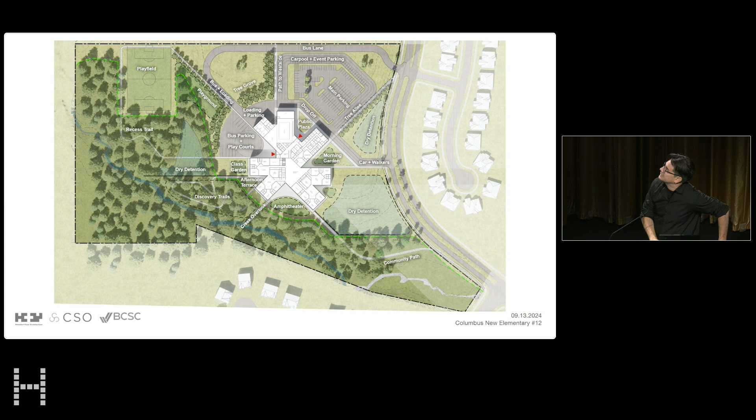We're working on the site plan, making sure that the classrooms, these 2 are facing the tree line, and these 2 are facing over here. All the parking is on the north side of the site, accommodating stormwater detention ponds, parking, bus parking, sight lines, security concerns, and so on.

2 very quick projects. LOG hosted an exhibition called Model Behavior. Many of our faculty were included in this. We wondered about models of democracy. We wondered about what's going on. How did this happen? What does the plan of the Capitol look like anyways? Where are those great rotundas and Senate chambers?

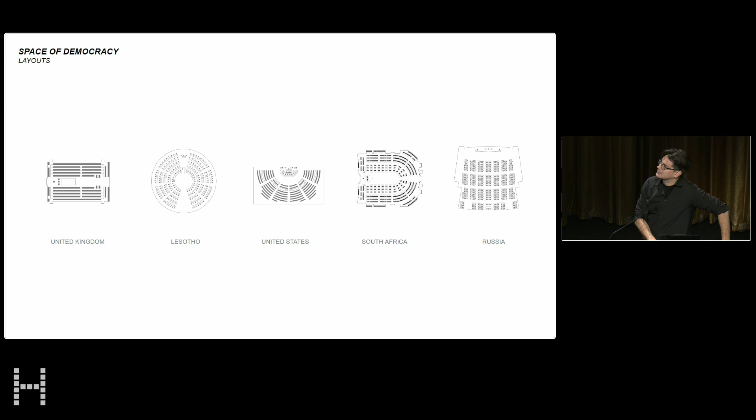I started to think about spaces of democracy and the spaces where democracy is done. And so I was interested in those rooms. You know, what are those rooms? The House of Lords or the House of Commons with this oppositional structure, the US semicircle, the horseshoe, and the lecture style space. And then what are the misbehaviors that are happening in these rooms? The brawling and the fighting and the insurrection. And I wondered if these misbehaviors were related to the architecture.

How do we think about the spaces of democracy and what happens there? And for this, I turned to my friend and colleague, Antoine Picon, who proposed a very thoughtful response, which is that the space and its decor has something to do with its decorum. How you behave in a space is related to its form, its material, its mood.

And then Daniel Ziblatt, who teaches just across the street, wrote this book called How Democracies Die. He was talking about the unwritten rules of democracy. And it's not about breaking rules, it's actually about exceeding the kind of unspoken rules, where the erosion of norms and civility is what leads us down this path. So we made this sort of booklet about what we learned. We did this exhibition at the Cooper Union in the storefront, showcasing what we researched about spaces of democracy.

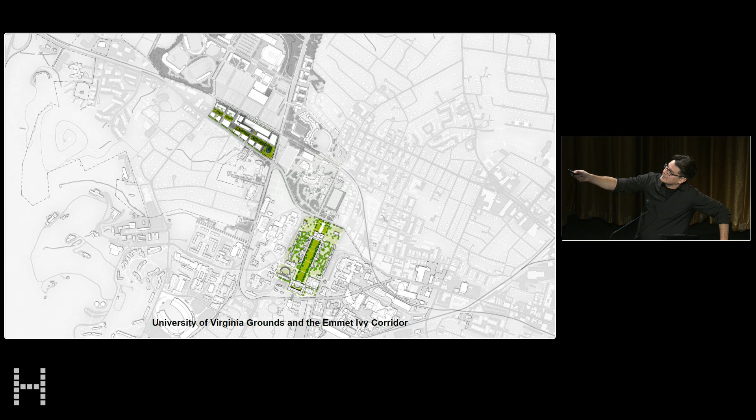So this was kind of a side project. We had been working on the University of Virginia Institute of Democracy. This is a new project that occupies this site on a new part of campus, right? This is the central grounds with the academical village. This is the kind of north-south axis of pavilions arranged around a low point, right? This is a high point, this is a low point, and it terminates on the Institute of Democracy.

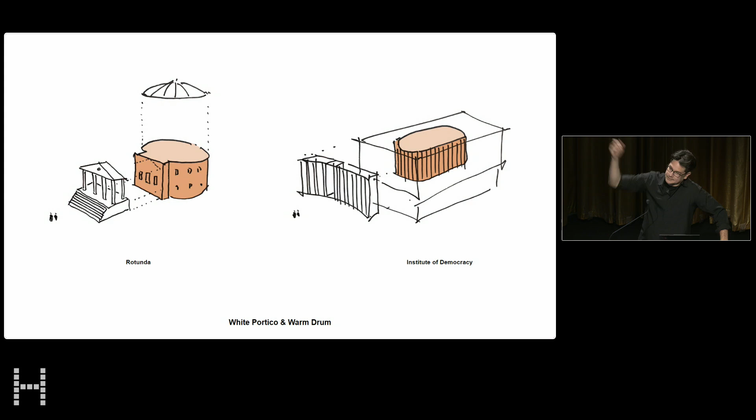So this is the configuration. This building has a lot of pressure on it. It has to sort of speak to the place. It has to sort of refer to its architecture. And we figured this sort of space of convening, this hall, this drum, might be analogous to the rotunda, screened by a row of white columns. But it's really about that space of gathering of scholars.

The shape of the hall is not any of the types that I described. It's kind of an avocado. It has this wraparound balcony on 2 levels and a boardroom that looks like the one in the rotunda, right? So it's evoking some of these sort of bundled figures, these sort of primary forms.

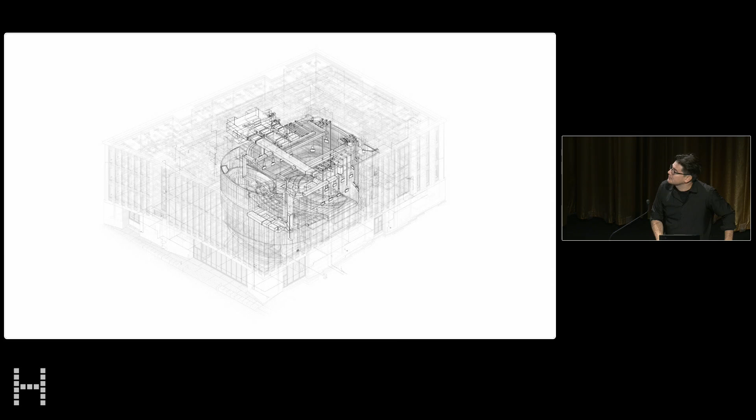But I'm very pleased with this idea of this balcony that wraps around. And so if there's a debate going on, you could stand behind this speaker, or you could stand behind that speaker. You can get different points of view, different vantage points. Anyways, and this is the drawing in the lobby. This is a Design for Freedom pilot project. So this is a program that's trying to certify fair labor in construction, so slave-free labor. That's the site.

Okay, in conclusion, I'll wrap it up. Here we are at the end of the lecture, and we find ourselves back on this orange clay from Albemarle County. We've been from the memorial to enslaved laborers to the fair labor of the Institute of Democracy. And these trades, these kinship designations are sort of signaling these laborers that we don't know, but they're here, in a way giving them voice. So I began to say that clay is a kind of intrinsically malleable plastic medium. We can shape it with our hands, we mold it to our purposes, we practice shaping it, and in doing so, we develop our ideas.

These are some of the descendants from the UVA memorial. Colleen Yates is a 7th generation descendant of Sally Hemings. Datiza Gathers told me that she found herself through the memorial process. She didn't know she was a descendant. Through the memorial process, she discovered she was related to the enslaved. I like to say that we design the world at a distance, but I think design also reshapes us. As we shape the world, it reshapes us. And I think that's what I wanted to conclude with.